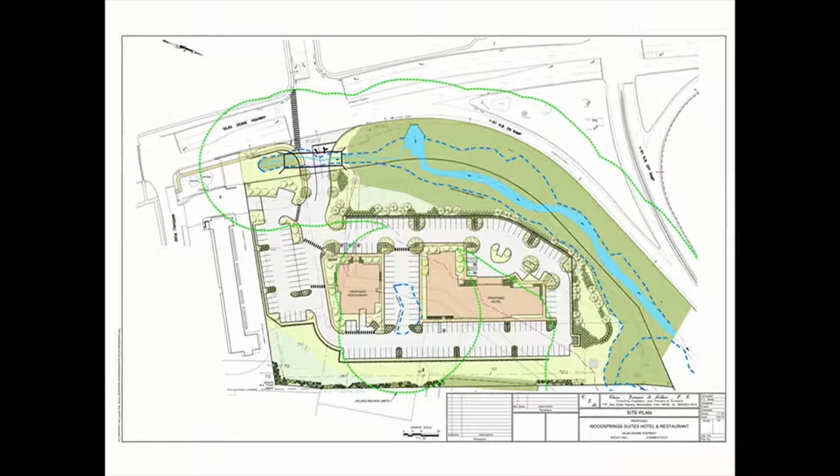Again, as Attorney Alter mentioned, our site drive was designed to align with Water Chase Drive across the street, and where the pointer is now, that was the proposed arch bridge. This proposed site plan that was approved also had 197 parking spaces.

that we do some excavation in the southeast portion of the site and filling over in the northwest portion. For those of you on the commission 3 years ago, you'll recall we had retaining walls at the edge of the parking. We primarily included those to limit fill and disturbance not only in the floodplain but also in the upland review area.

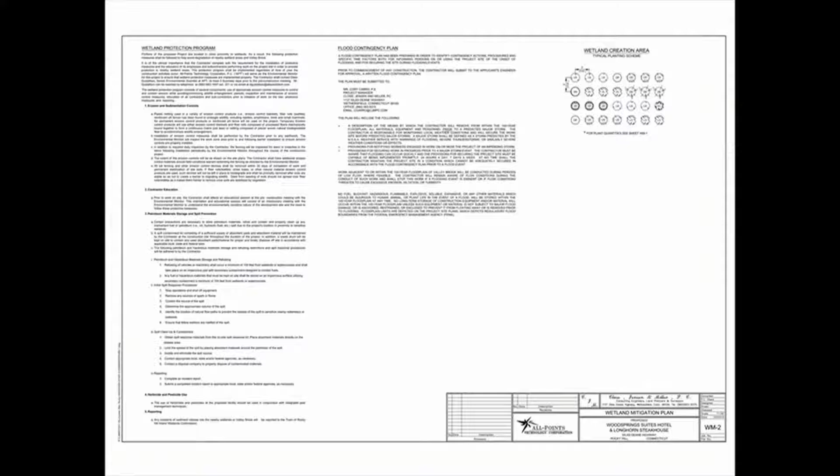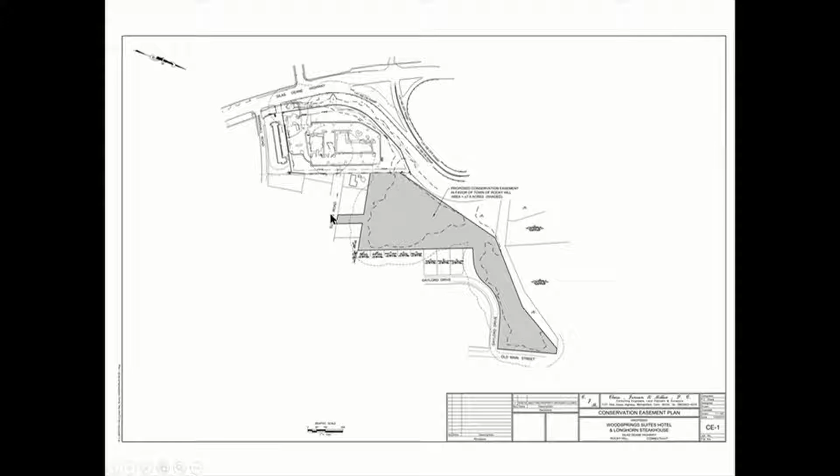So that's a brief recap of the 2019 approved plans. So moving on to the 2022 plans,

briefly, you can see the site drive is aligned in the same location. We still have the restaurant space and the hotel space. We do have it switched from Longhorn Steakhouse to Olive Garden. The front door of the Olive Garden restaurant will be facing the Howard Johnson's, facing south, whereas Longhorn's was facing Silas Deane.

The hotel footprint expanded slightly because we took one of the floors off of the hotel. That was a product of the planning and zoning process. With that footprint expansion, we did lose approximately 6 parking spaces where I currently have the cursor.

So we've reduced the parking by 6 spaces to 191. But retaining walls, the infiltration basin, drainage, grades, everything else is pretty much in the same place. The retaining walls and infiltration basin, there's no changes to those at all. We'll get to the utilities - there are some slight changes there.

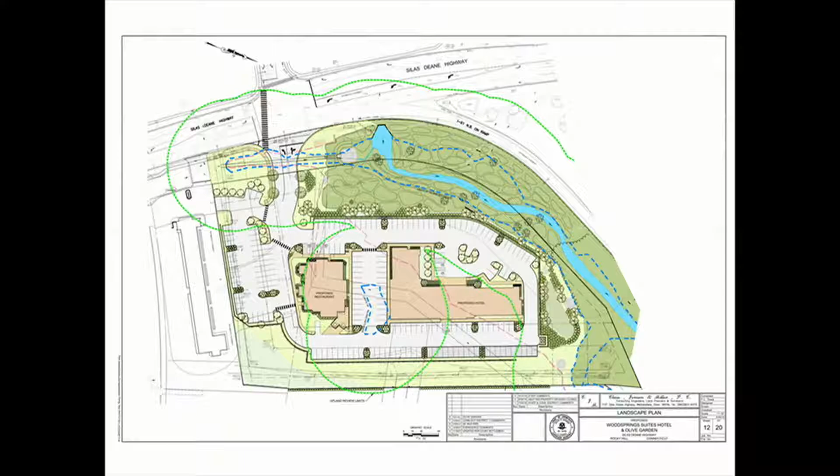As Attorney Alter mentioned, in early 2021 we began working diligently with MDC, with Eversource, with ConnDOT in anticipation of the structural design for the Arch Bridge. We commenced a series of geotechnical borings. The result of those borings was very poor soils, much poorer than had been anticipated. It was going to require a really elaborate structural design consisting of deep piles, pile caps, and so forth.

There was also the sanitary sewer, MDC sanitary sewer, which parallels the east side of Silas Deane Highway. In working with MDC - I'll try and put it kindly - they were not thrilled that they would have to relocate that sanitary line. Also working with ConnDOT, again trying to put it mildly, they were not thrilled with the Arch Bridge being in their property. There's also some considerable erosion along the western embankment of this man-made drainage ditch.

So we did, as Attorney Alter mentioned, a reevaluation. Between ConnDOT, the erosion of the man-made ditch, MDC, and the poor soils, the structural design required for the Arch Bridge would have required us to come back to this agency for an additional amendment. In 2019, we had anticipated being able to span that entire intermittent water course, but with the structural requirements we would have been into that wetlands.

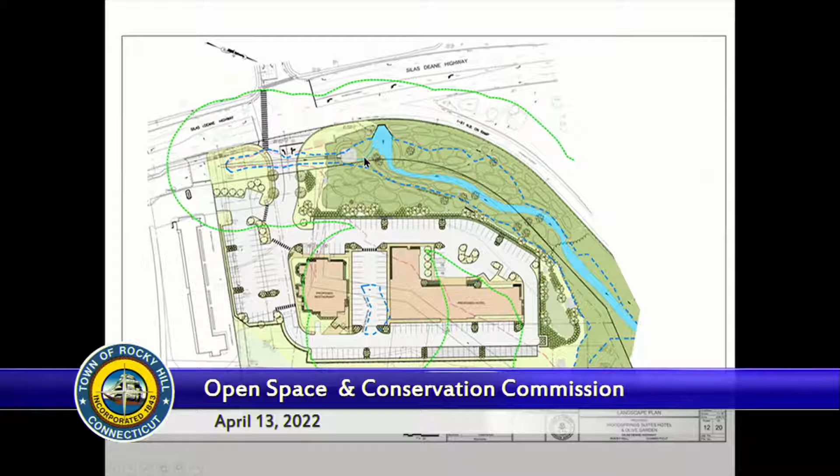Again, we contacted ConnDOT. They asked us to prepare a revised plan, which we did. It took a while for ConnDOT to, shall I say, come on board. They had some reservations at first, but they realized that we were doing a lot of improvements, creating a diverse and new habitat with native species. A lot of the trees that even appeared to be alive out there were actually covered in poison ivy and other invasives and such.

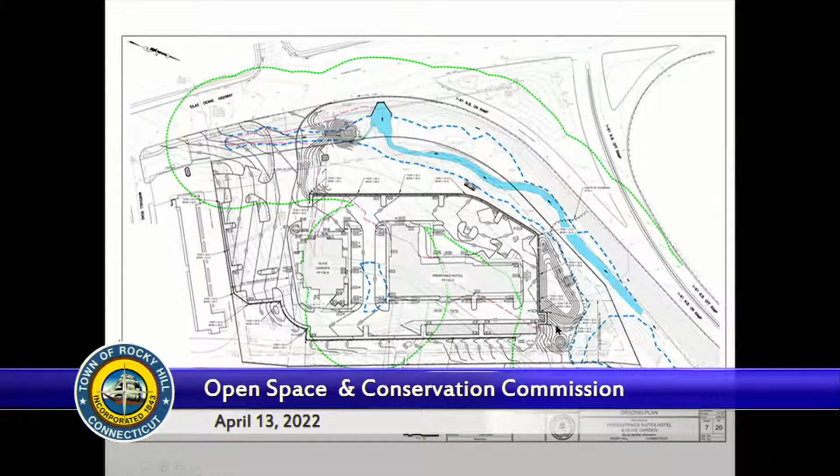Just going through the 2022 plans now - again, these are basically the same plans from 2019, just to run through them quickly. This is the site grading. You'll notice the retaining walls, same location, infiltration basin, scour hole - all of that is the same. There were just some minor tweaks to this graded swale here as a requirement of Eversource. The most significant grading change is along the 54-inch pipe along Silas Deane Highway and the grades around the scour hole. All the other grades in the parking lot remain the same.

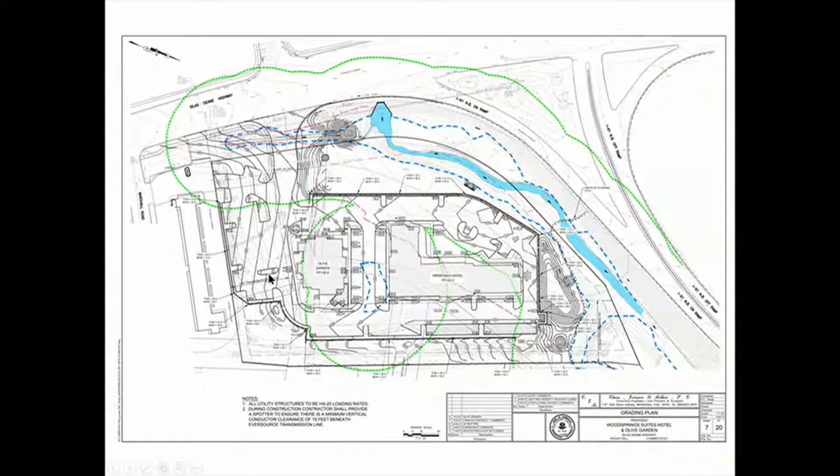Because of the 54-inch pipe and the filling we're doing within that intermittent water course, a portion of the floodplain was affected. So we had to increase the length of some of the 60-inch RCP compensatory flood storage pipes beneath the paving. I think we added one leg here. But again, that doesn't affect any upland review areas or wetlands. That's all contained below the proposed parking.

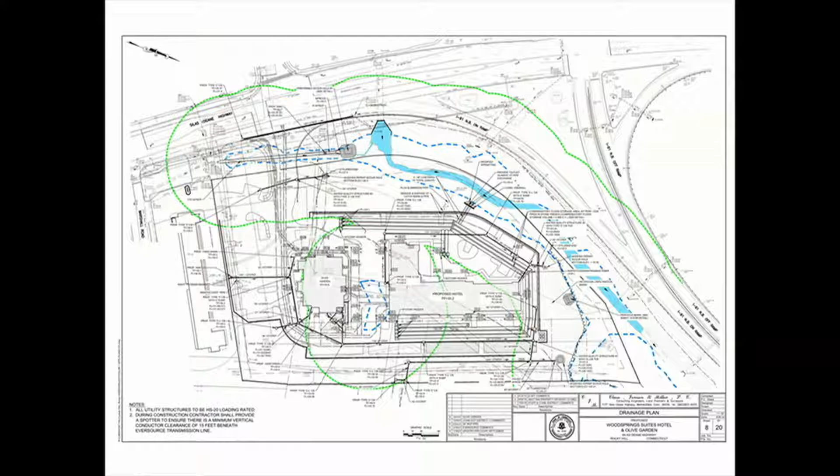The site utility plan. On the current plan, all the site utilities will be coming in the site drive. As you recall from the 2019 plan, I mentioned we had a utility pole in the southwest corner of the site where we anticipated getting electric and telecom. Eversource, for technical reasons, told us we could not access that pole for our electric and telecom, that we would have to come off the site pole just on the south side of the proposed entry drive. So that reflects that change.

Again, as I mentioned, that sanitary line, which would have had to be relocated—you recall it came diagonally across this parking lot—once we switch to the 54-inch pipe, that sanitary line can now stay in place. Water services, domestic and fire, I believe just shifted over slightly in the drive aisle. Gas shifted over slightly too. But again, all utility services are coming from Silas Deane, and there are minor changes to the rear of the Olive Garden, since some of their utility connections come in a different location than the Longhorn Steakhouse did. But again, there's no effect on the wetlands.

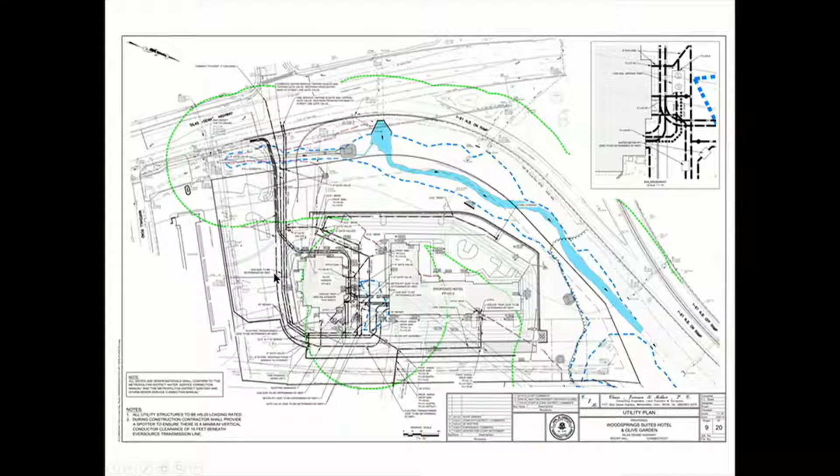Moving on to erosion and sedimentation control. As I mentioned, on the 2019 plans, we did have some material stockpiles within the Eversource right-of-way, which is about 100 feet wide along the southerly and easterly property lines. Eversource was concerned with bucket loaders and so forth operating there, that there could be conductivity issues with the overhead lines. They asked us to move them outside of their right-of-way. So in essence, that means the hotel would be the first building constructed and the restaurant would be the second building constructed.

All the other erosion controls, construction entrances and so forth remain the same. The only addition is along Valley Brook, on both sides of where we would be doing the tree removal. We're calling for proposed coir logs or natural material filled filter socks along both sides of Valley Brook.

So with that, I think I'm going to turn it over to our soil scientist, and he'll give you some background, more background on the wetlands and proposed plantings.

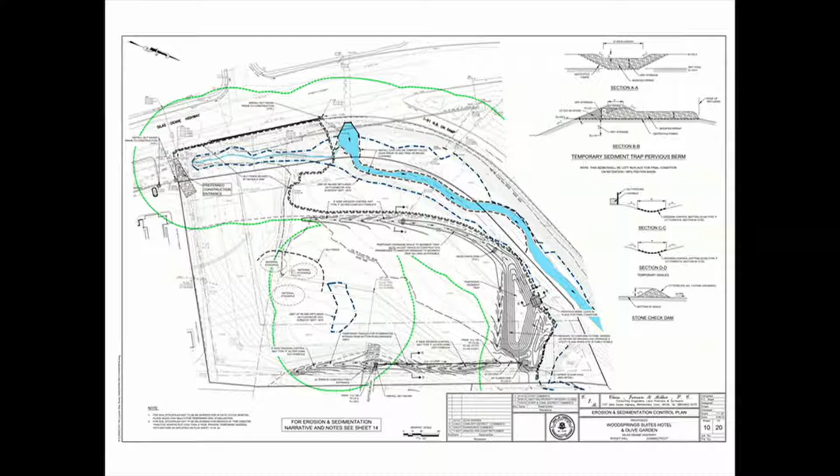The history of that was reviewed through various historic aerial photograph interpretations, as well as a geotechnical investigation done historically on the property by Clarence Welti. In this particular area, the geotech investigation confirmed there's over 9 to 10 feet of fill material. So it's not naturally occurring, and as such, because of its isolated and small nature, it supports limited functions and values.

So those two features are what this application was originally proposed to impact. With a minor modification, we are extending the pipe through this section of the constructed drainage swale feature, and essentially proposing to expand our original impact to that feature. But from a wetland function and value characterization standpoint, its principal function is conveyance of stormwater. That function will remain with the 54-inch culvert, so we don't see this as significantly affecting wetland functions and values with this minor modification.

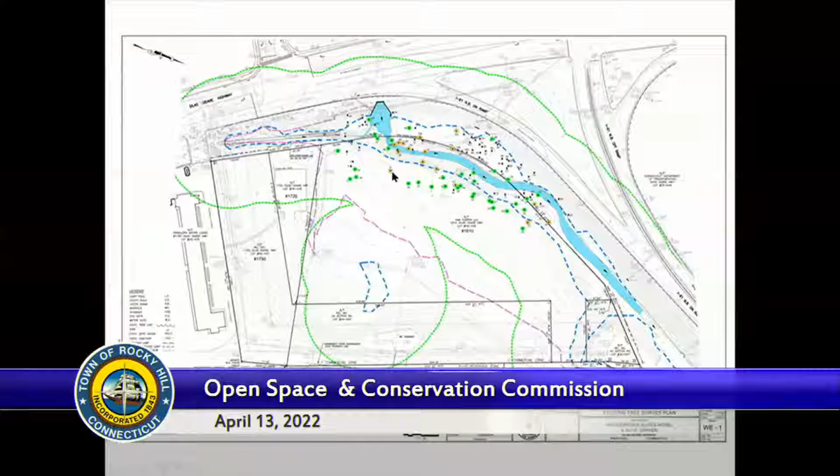As Kevin had alluded to earlier, an arborist performed a tree survey of the subject property and the DOT property. This shows the detail of the surveyed location of the trees, particularly within the riparian corridor for Valley Brook. Both trees were surveyed within the wetland limits as well as the upland review area limits.

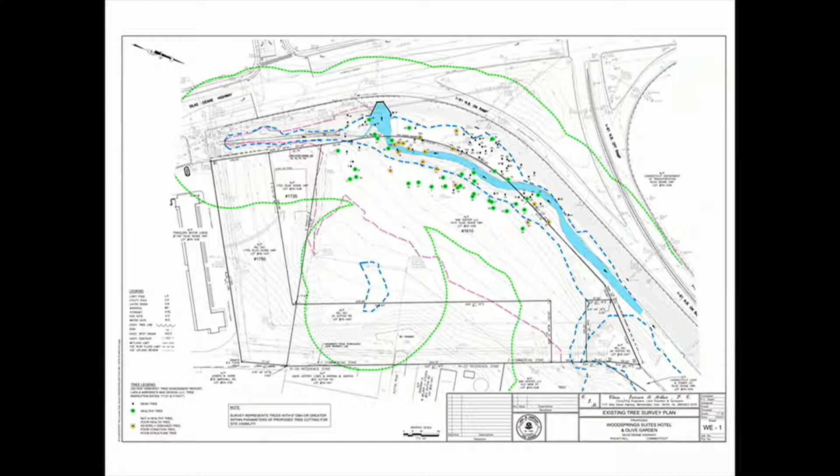The trees are graphically represented by dead trees that have X's through them, and the yellow points are for trees that are in poor health condition, and then the green trees are identified as healthy trees. But as Kevin had noted earlier, a significant proportion of those healthy trees are considered invasive trees, black locust and Norway maple.

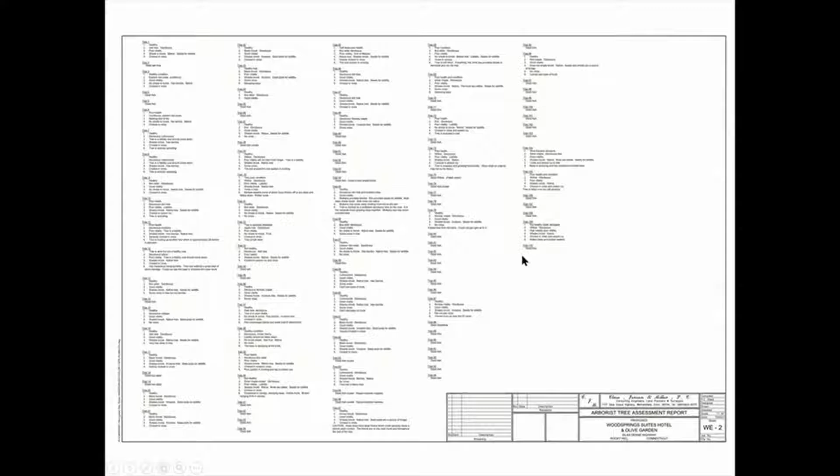This is just a tabulation of all the trees, their condition, the species, etc. I'll just flip through to what's probably more important, based on that data.

We worked closely with Kevin and his landscape team, and also with the ConnDOT Environmental Group. A major portion of this enhancement plan is located on DOT property, and I don't know if any of you have ever had to deal with the environmental group at ConnDOT, but they are a very talented group. They deal with a lot of environmental effects from roadways. They're extremely knowledgeable.

So they were concerned to make sure that if we are going to do some select removal of trees and improve this area, we actually improve the Valley Brook riparian corridor. In addition to the plans issued to them, we had to submit an environmental evaluation of the plan, how it would affect Valley Brook, and whether there were any possible detrimental effects from the proposal.

They were mainly concerned about erosion during clearing activities, or once clearing is performed and the planting has occurred before things are finally permanently stabilized. Are there going to be any erosion concerns? So, and then also the species distribution, what they were looking for was a compilation of native smaller, short-growing trees and native shrubs and an understory of native herbaceous vegetation.

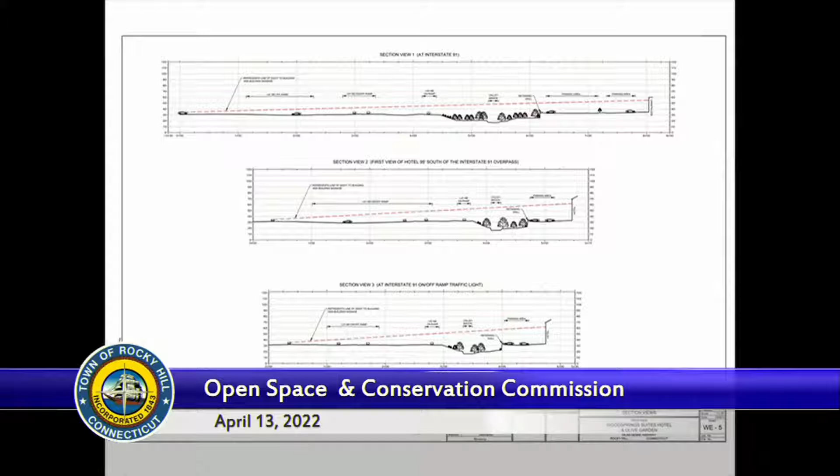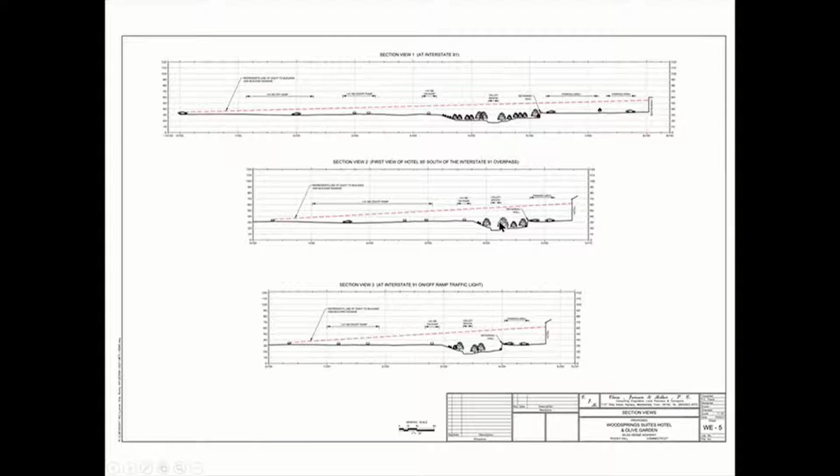These next two sheets just show sectional views from nearby roadways, I-91 and Silas Deane Highway. The one thing that we did analyze is that with the removal of some of the degraded forest canopy, the dead trees, it's going to improve view lines into the proposed site and the development. We also wanted to evaluate that with respect to what we're proposing for a planting plan, showing some of the mature growth in the riparian corridor. Valley Brook is centered in through here, and it's labeled on these sectional views.

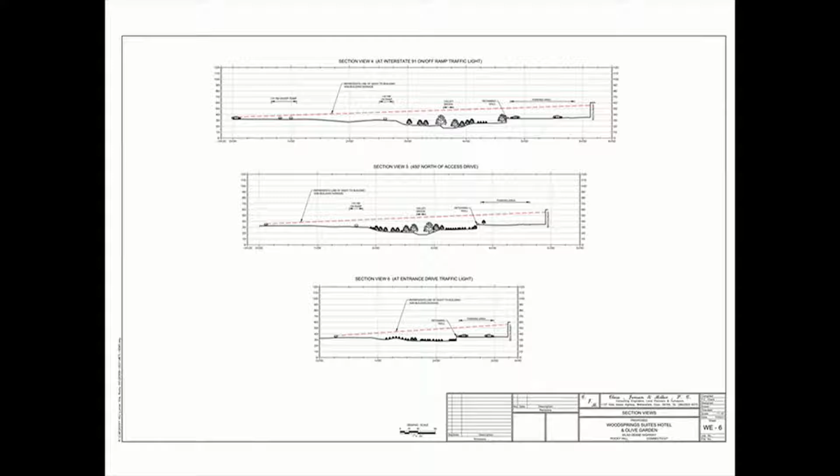As part of the original proposal that was approved by the commission, we had developed a fairly robust suite of mitigation measures to compensate for the project's unavoidable activities within the two man-made degraded wetland areas, as well as the upland review areas to Valley Brook.

That part has been still retained with this proposed modification. No changes have been made to that. So I'll just briefly describe some of the major elements.

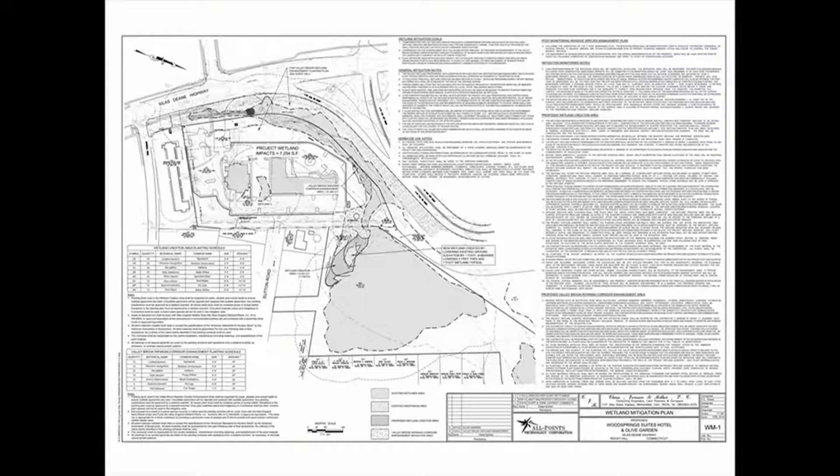We are providing a wetland creation area, as Kevin had mentioned, in this portion of the site, approximately 8,000 square feet of new wetlands that'll be attached immediately adjacent to this forested wetland system. That'll more than compensate for the project's 7,256 square feet of resource loss.

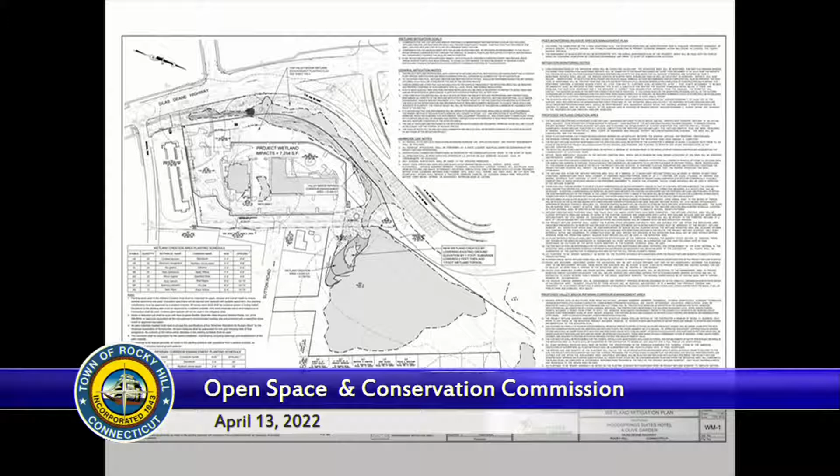As part of the Valley Brook Enhancement Planting Plan, which is dovetailed in with our original plan to enhance this area in the upland review area, a major part of that is that the understory of the Valley Brook corridor is dominated by woody invasive shrubs—multiflora rose, bittersweet, bush honeysuckle. Those species will be removed as part of this enhancement plan, the mitigation plan, and we'll obviously be replacing those with native plants, native shrubs, short trees, and herbaceous material.

That'll provide a significant enhancement to the wildlife function of Valley Brook by removing invasives and utilizing native species that'll have a higher utilization rate by native small animals, birds, etc.

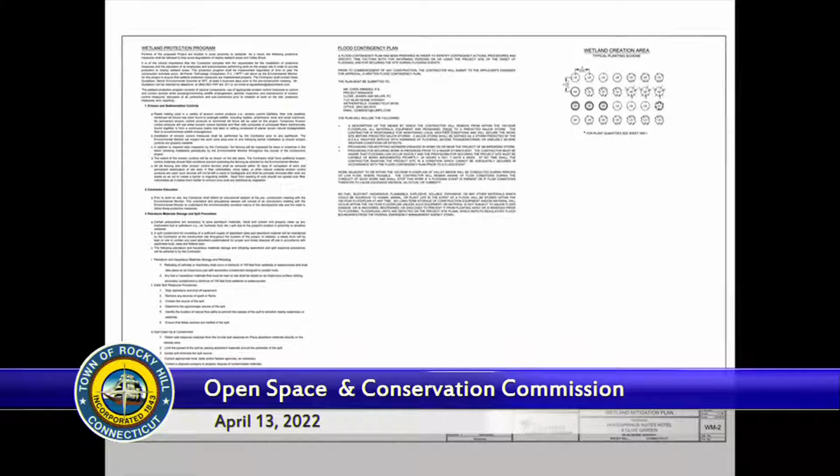The project obviously consists of a lot of work in and around Valley Brook, and so we felt it would be important to implement a wetland protection program. Essentially, an environmental monitor, a wetland scientist, will be assigned to the construction project. We'll go through a pre-construction contractor training session to make them understand the environmental sensitivity of the project site, the importance of protecting wetlands in Valley Brook during construction, and also review all of the mitigation measures so they fully understand how the project's construction and the enhancements dovetail with protecting this resource throughout the course of the construction duration.

And then finally, as Kevin had referred to earlier, as well as Attorney Alter, what was originally proposed was a 7.9 acre conservation easement, consisting of forested wetlands and adjacent upland habitats, located in the southeastern region of the subject parcel. That'll be protected in perpetuity. So when you combine all those elements together, it's a fairly robust mitigation plan for some somewhat small resource impacts.

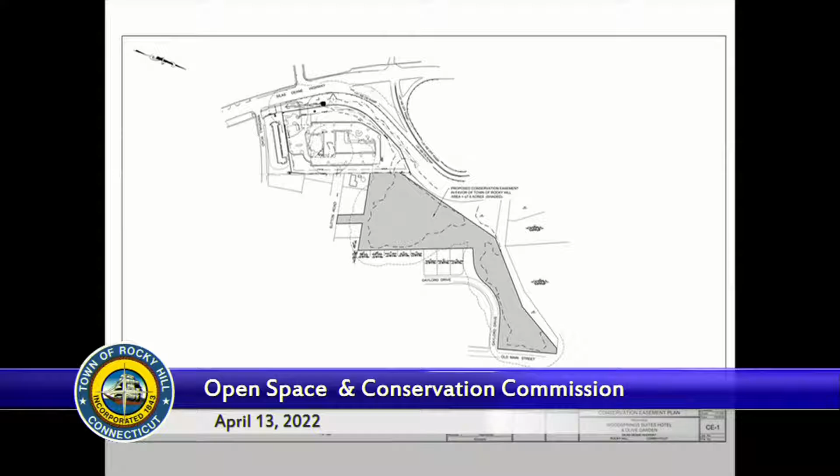And with that, I will hand it back over to Attorney Alter to conclude our presentation.